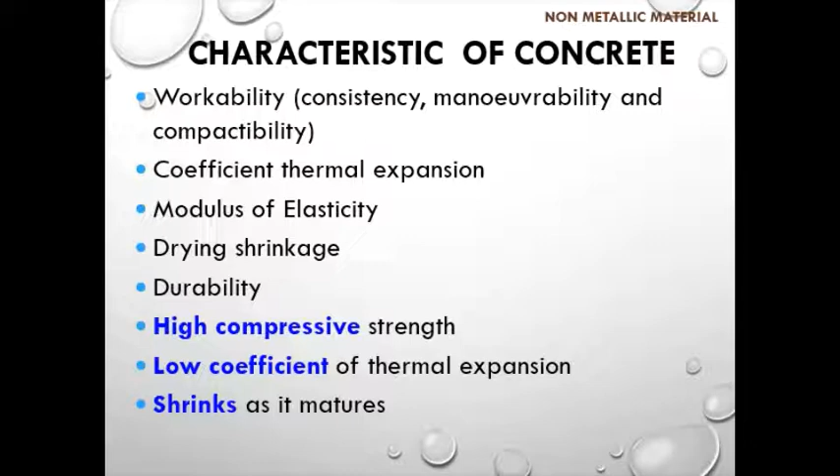For today's video, we will go through subtopic 5.3, Introduction to Advanced Material. There are three learning outcomes: define advanced materials, describe the advantage of advanced material, and discuss examples and applications of advanced material. The examples are nanomaterial, superalloy, smart material, and composites. We will go through these three learning outcomes in this video.

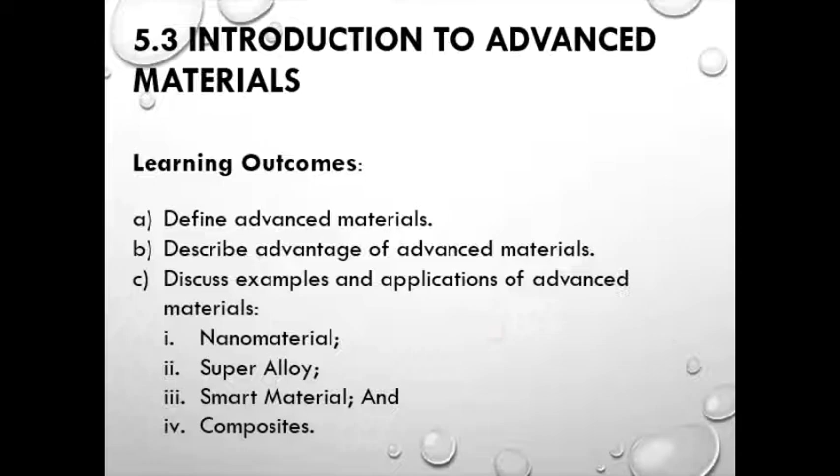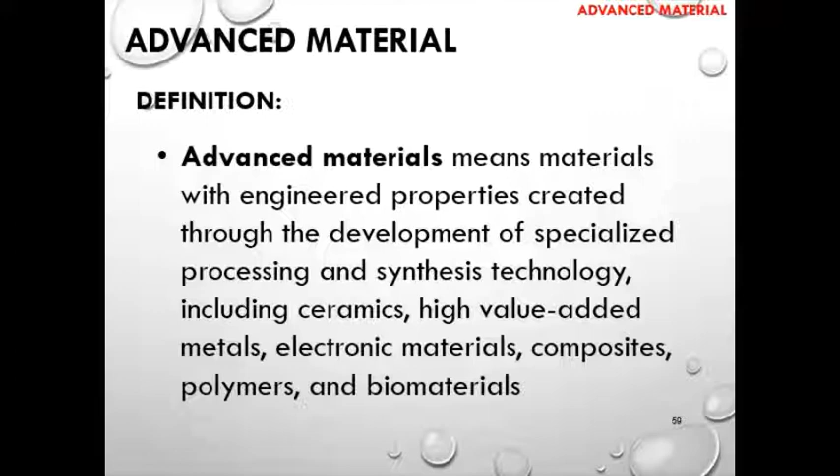So what is advanced material? Advanced material means material with engineered properties created through the development of specialized processing and synthesis technology, including ceramics, high value added metals, electronic materials, composites, polymers, and biomaterials. This advanced material is material created by humans through various processes involving synthesis of specific technology or processes so that we can produce more advanced material. So advanced material means it will improve in terms of physical properties such as weight, strength, malleability, conductivity, corrosion resistance, durability. Through the engineering process, we will improve the materials in terms of these properties.

These advanced materials have numerous applications in the manufacturing industry and medical fields. There are 4 advanced materials that we will look at in this video: the first one is nanomaterial, the second one is superalloy, composites, and smart material. Advanced material is material designed by humans so that we can produce a material whose properties are very good, very suitable, and can be used widely in any field or industry.

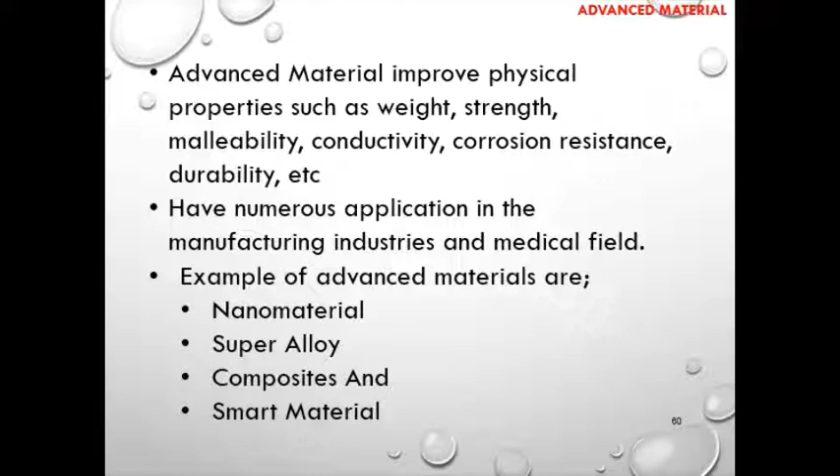Okay, so let's look at nanomaterials. What is nanomaterial? Nanomaterial can be defined as material possessing at minimum one external dimension measuring 1 to 100 nanometer. So when we say nano, it means we have the materials but in nano size, where the thing is very small.

Nanomaterials can occur naturally, where nanoparticles are produced during volcanic eruptions, created as the byproduct of combustion reactions, or be produced purposefully through engineering to perform a specialized function. So basically nanomaterials can happen naturally through volcanic eruption processes, or through processes we specialize to produce these nanomaterials, either through combustion reactions or through specialized functions.

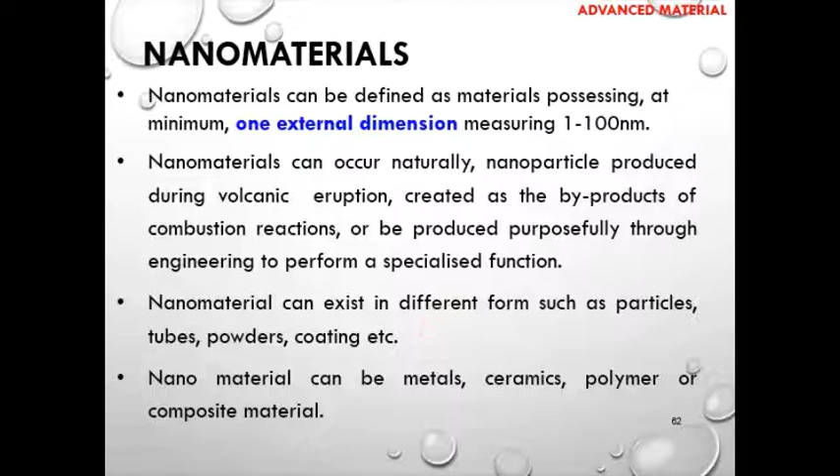This nanomaterial can exist in different forms such as particles, tube, powders, coating, and etc. This means nanomaterial has many types we can find. We call it nanomaterial - it can be metals, can be ceramics, can be polymer or composite material. So it can take various forms, where nanomaterial is a material that is very small.

So what is the application of nanomaterial? Because nanomaterial is very light and very small, it has many uses and many advantages. One of the applications is baseball bats, where one form of nanomaterial is carbon nanotube. With the use of carbon nanotube, it makes the bat lighter.

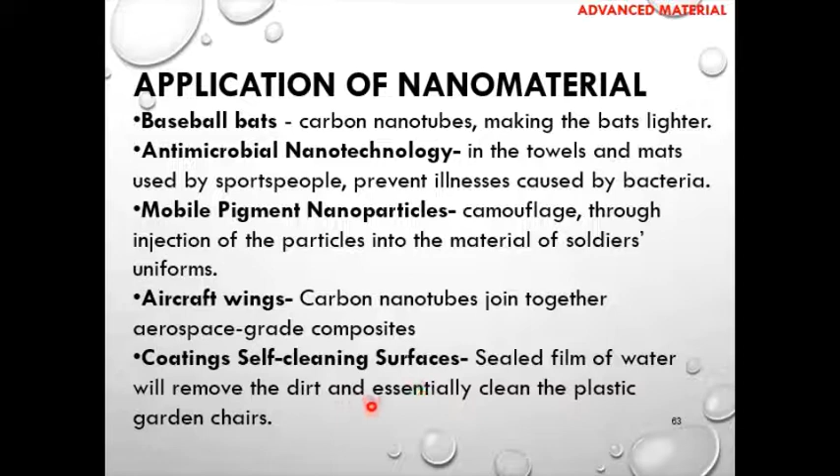And the last one is nanomaterial used as coating for self-cleaning surfaces, where they form a sealed film of water, removing the dirt and essentially cleaning plastic garden chairs, making it easier for cleaning.

So what are the advantages of nanomaterial? Nanomaterial has extremely small size, and when it's small size, it offers various different advantages. There are many advantages offered by nanomaterials. We can tailor it according to desired requirement for specific applications - we can use this nanomaterial according to our needs, according to the specific application. It also has high porosity, which increases demand for their use in a multitude of industries. This nanomaterial has many small holes or pores, which makes it more useful.

It is also efficient in energy generation, cost effective, and increases the accuracy of the construction of electronic circuits on an atomic level. Because it is very small, its usage in electronic circuits and electronic devices is very widespread.

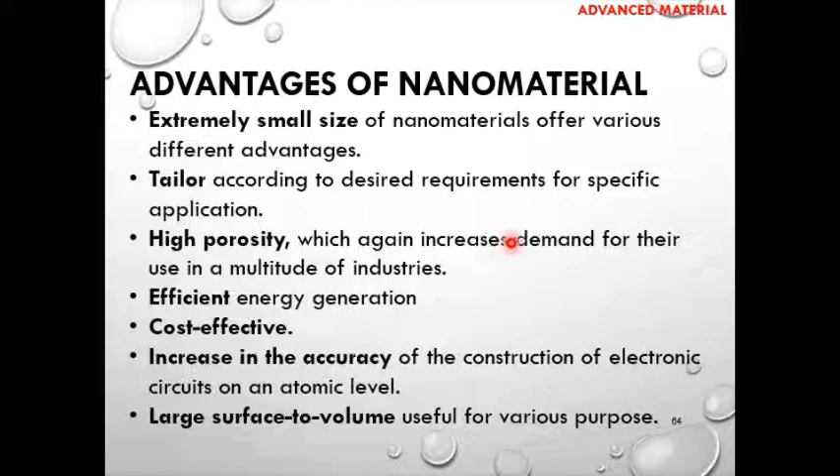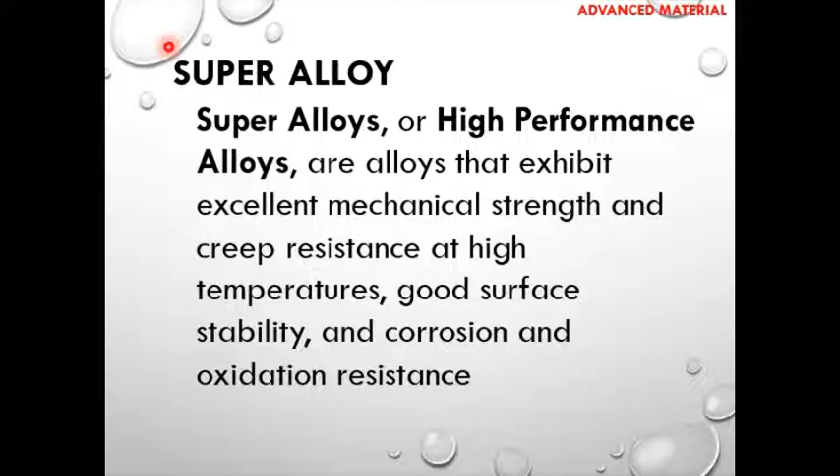Okay, so this super alloy development has depended heavily on both chemical and process innovation. So super alloy ni develop high temperature strength through solid solution strengthening and precipitation strengthening from secondary phase precipitates such as gamma prime and carbides. So they are very high temperature strength lah.

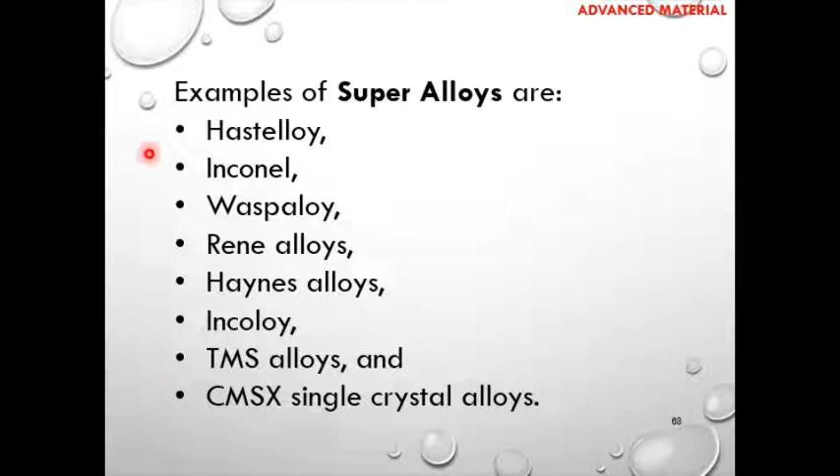So apa itu kelebihan, advantages of super alloy? So they possess really good mechanical strength, they exhibit excellent resistance to thermal creep deformations. So walaupun mana diperlukan suhu yang sangat tinggi untuk membentuk dia, so dapat resistant lah to the thermal creep, and they also have a good surface stability with superior resistance to corrosion or oxidation.

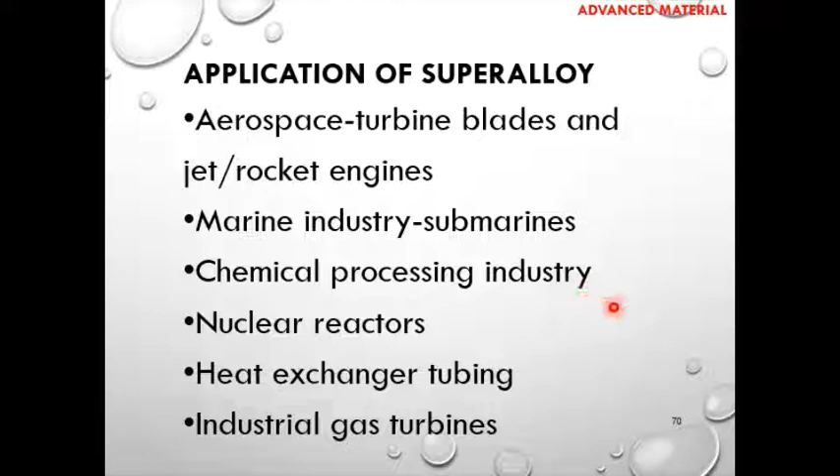Okay, so the next one is the composites. So kita tengok apa itu composites. Composite adalah material made from two or more metallic materials and or non-metallic materials. So dia adalah gabungan metallic dengan metallic ataupun metallic dengan non-metallic lah. Dia adalah gabungan materials yang mana bila bergabung it has significantly different physical or chemical properties which remain separate and distinct on a macroscopic level within the finished structure.

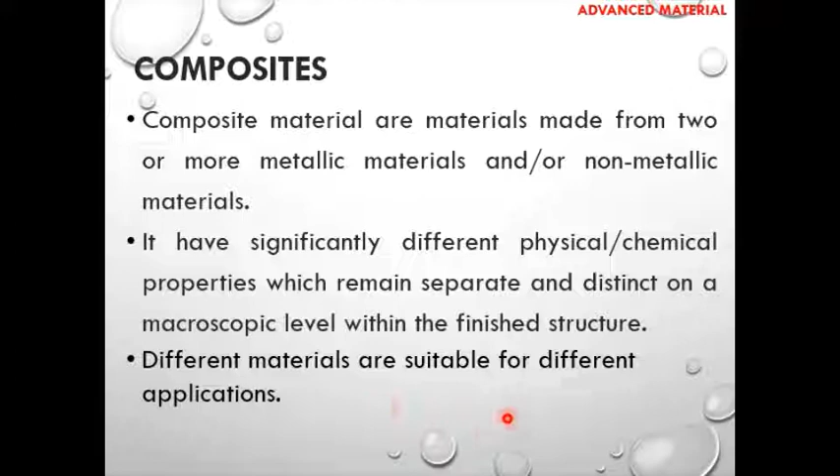So in composite materials, there are two categories of constituent materials. There are matrix and reinforcement. So reinforcement imparts its special mechanical and physical properties to enhance the matrix properties.

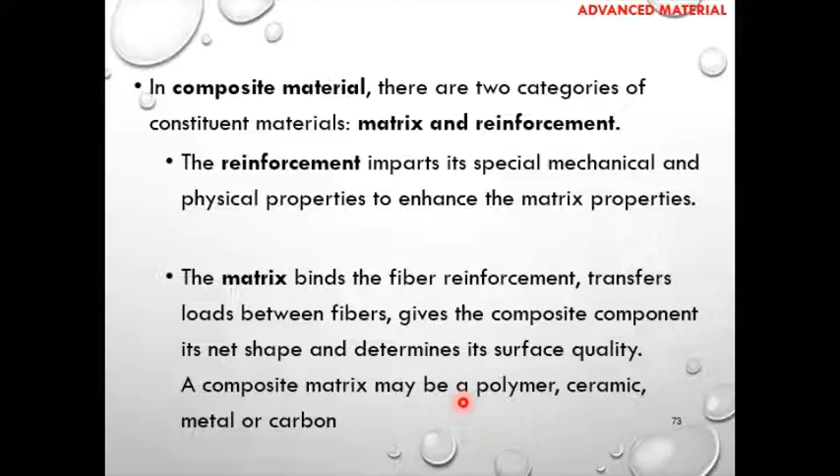Okay, so composite dia categorized two different levels. The first level based on the matrix constituents such as PMCs, MMCs dan CMCs. Yang mana second level derived from the matrix constituent forms such as particulate reinforced composite, flake composite, fiber reinforced composite